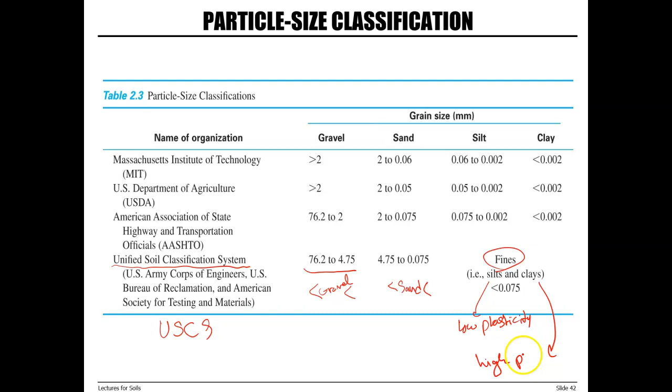Then we look at plasticity. Silt has low plasticity and clay has high plasticity, but based on size, their particles are smaller than 0.075 millimeters. This is the classification provided by the Unified Soil Classification System, from the U.S. Army Corps of Engineers. But other organizations provide different numbers.

For example, we have MIT, Massachusetts Institute of Technology, which has a different definition. Based on MIT, gravel is whatever is larger than 2 millimeters. Sand is between 2 to 0.06 millimeters. Silt is between 0.06 to 0.002 millimeters. So actually we have a size separation between silt and clay for MIT. Clay is whatever is smaller than 0.002 millimeters.

USDA, the US Department of Agriculture, also has grain size definitions. Gravel is the same as MIT, but the limit for sand is different, and also silt. Sand is between 2 millimeters to 0.05 millimeters, and silt is between 0.05 millimeters to 0.002 millimeters.

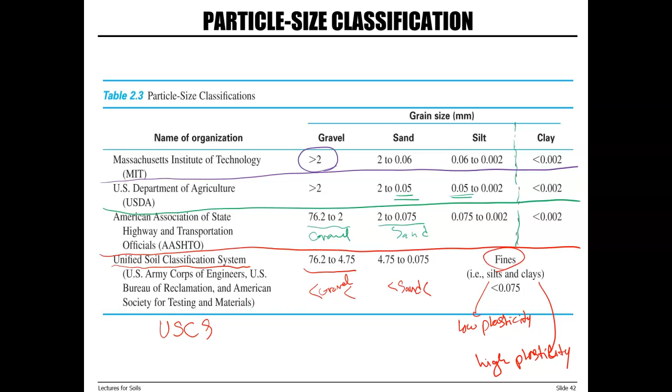For these three systems, there is a size separation between silt and clay. For USCS, we call silt and clay 'fines,' and the separation is based on low or high plasticity. This slide shows the same thing: the size definitions based on MIT, USDA, AASHTO, and USCS. USCS is the only one with no size separation between silt and clay, but the other three have clay, silt, sand, and gravel.

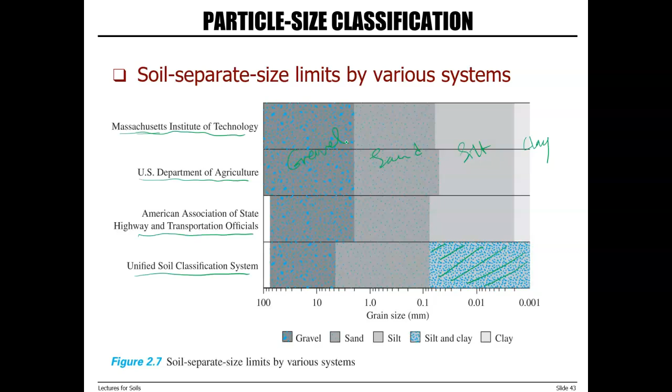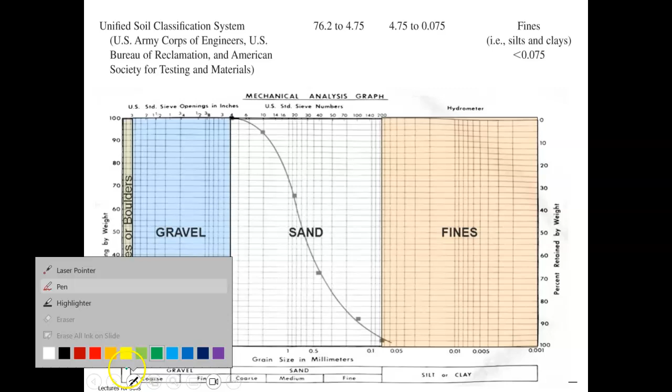Again, when we have a gradation curve, we see these sections. If we follow USCS, Unified Soil Classification System, these are the limits provided. Fines are particles smaller than 0.075 millimeters. So 0.075 here corresponds to sieve number 200.

Sand is particles between 4.75 to 0.075 millimeters. Here is 4.75 millimeters, which is sieve number 4. So this is sieve number 200, and this is sieve number 4.

Gravel is defined as particles smaller than 76.2 and larger than 4.75 millimeters, so between 4.75 to 76.2 millimeters. Anything larger than 76.2 millimeters is referred to as cobbles or boulders.

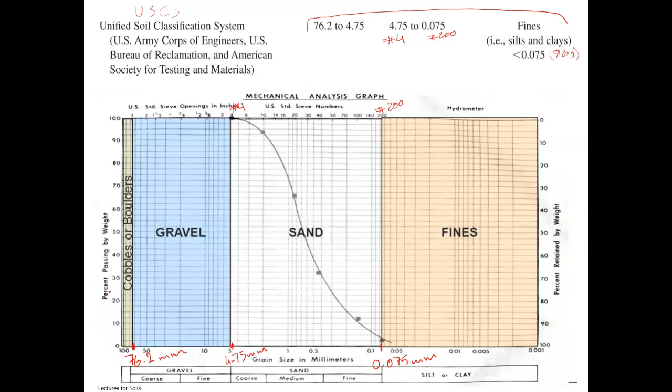So now we want to calculate. What we are trying to calculate in this lecture is, given a soil sample, what is the percentage of gravel, sand, and fines?

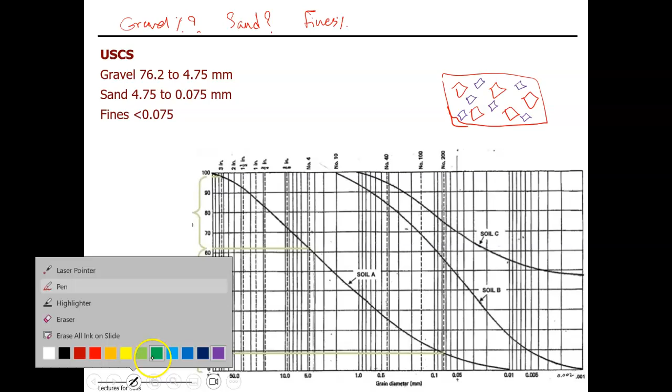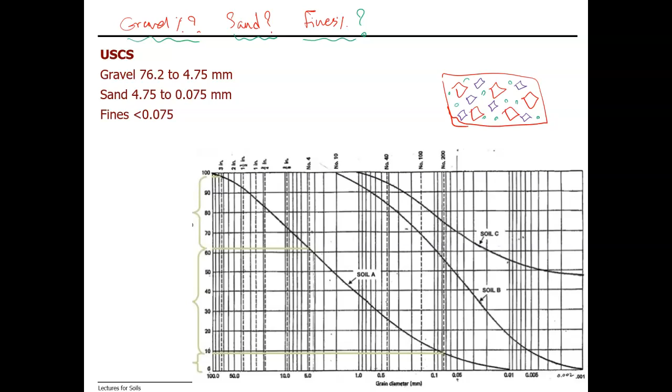So we have a soil sample containing gravel, sand, and silt and clay. We want to see what is the percentage of silt and clay, what is the percentage of sand, and what is the percentage of gravel. Our soil sample is made from particles of different sizes, and it's important to know how much of each size we have. So that's what we want to do: calculate the percentage of gravel, sand, and silt in our soil sample.

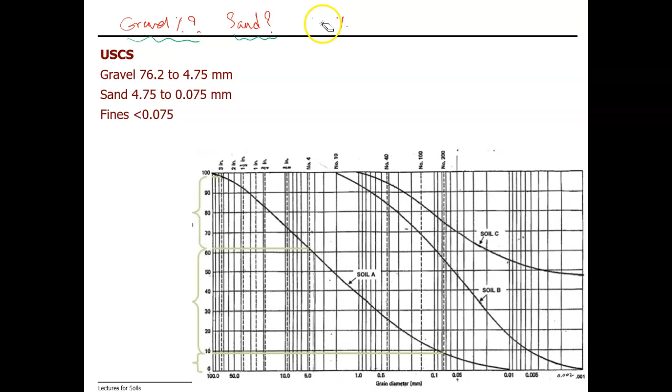Gravel, sand, and fines—for USCS, we refer to it as fines. Gravel is particles smaller than 76.2, larger than 4.75 millimeters. To calculate the percentage of gravel, we need to look at percent passing from these two sieves: 76.2 millimeters and 4.75 millimeters.

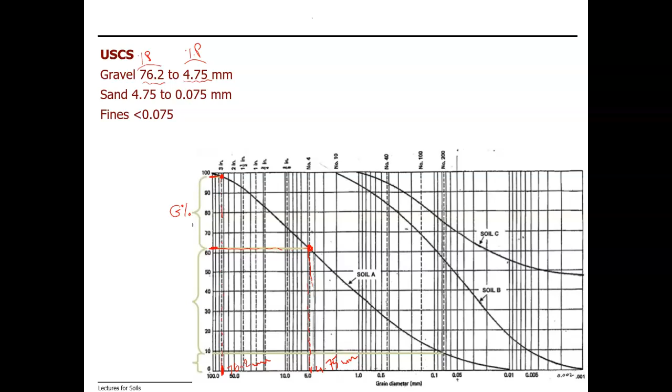You start from here, draw the line until you get to your gradation curve, then draw the line to percent passing. We need percent passing from 76.2, and same thing for 4.75 millimeters. The percentage of gravel equals percent passing from the sieve with an opening of 76.2 millimeters, minus percent passing from the sieve with an opening of 4.75 millimeters. That's how we calculate gravel percentage.

So 76.2 is 3 inches. Now we need to do the same thing for sand.

Sand is particles between 4.75 to 0.075 millimeters. So we need to look at percent passing from these two sizes: 4.75 millimeters and 0.075 millimeters.

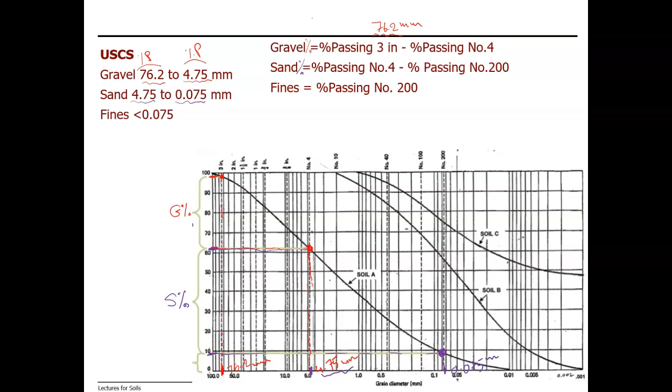Percent of sand in our soil sample equals percent of material passing through sieve number 4, which has an opening of 4.75 millimeters, minus percent passing from sieve number 200, which has an opening of 0.075 millimeters. And this is 3 inch, which has an opening of 76.2 millimeters.

And then finally, the percentage of fines. Fines are particles passing through or smaller than 0.075, meaning materials passing through sieve number 200. So fines percentage equals percent passing from number 200.

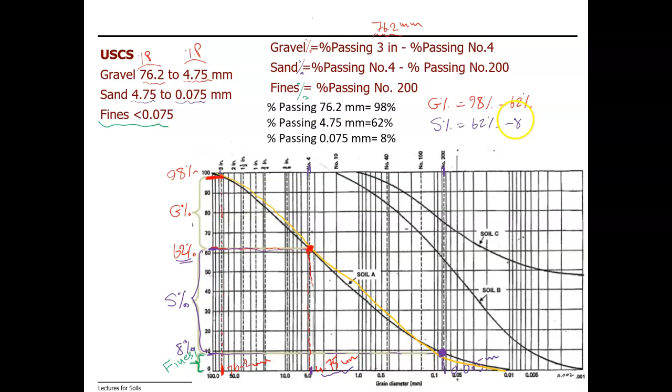Fines is percent passing from sieve number 200, so it's just 8%.

And if you add all of these together, you get 100%. So the soil that we have is 36% gravel, 54% sand, and 8% fines. Or we can say that 92% is coarse material and 8% is fines. So we can say that this is a coarse grained soil with 8% fines.

You can try to do the calculation for soil B and soil C to practice.

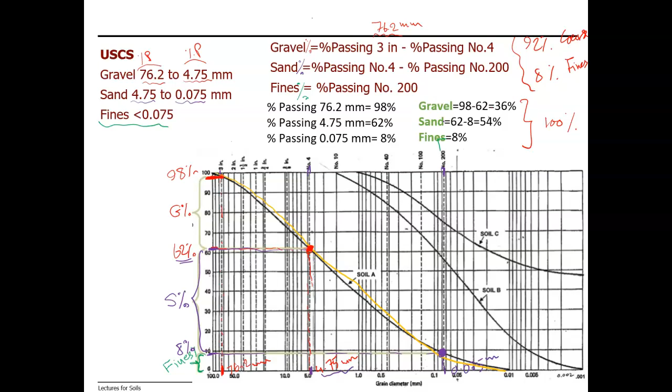Now let's go over a couple of examples. Example number 1, this is very similar to question number 1 in soil homework. For a soil, suppose that D10 is 0.05 millimeters, D30 is 0.25 millimeters, and D60 is 0.5 millimeters. Calculate the uniformity coefficient and coefficient of curvature.

Coefficient of curvature is D30 to the power of 2 divided by D10 times D60, and coefficient of uniformity is D60 divided by D10. So you just need to plug in the numbers and calculate coefficient of uniformity and coefficient of curvature.

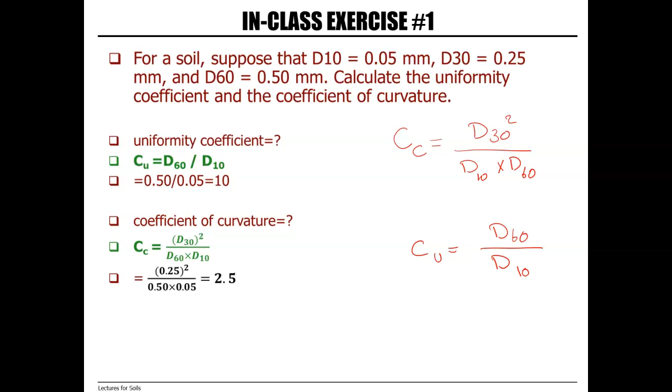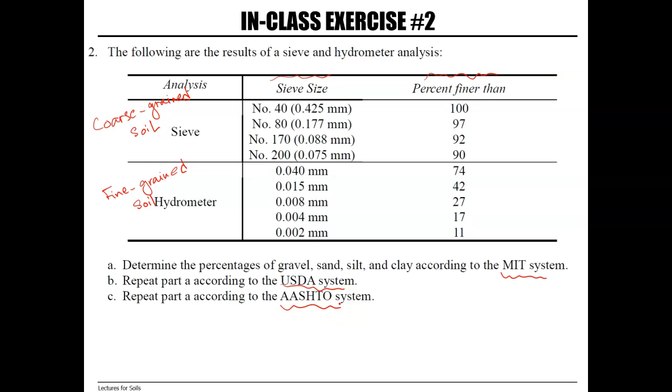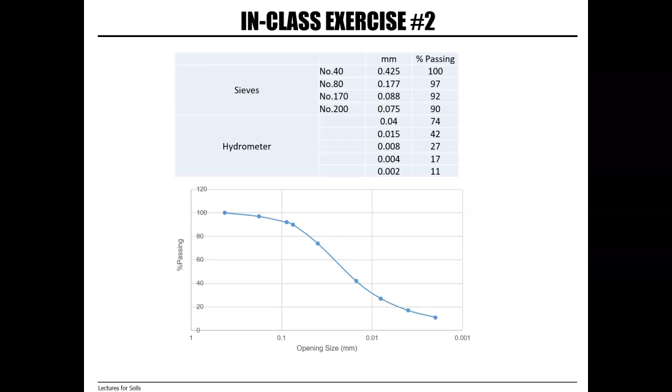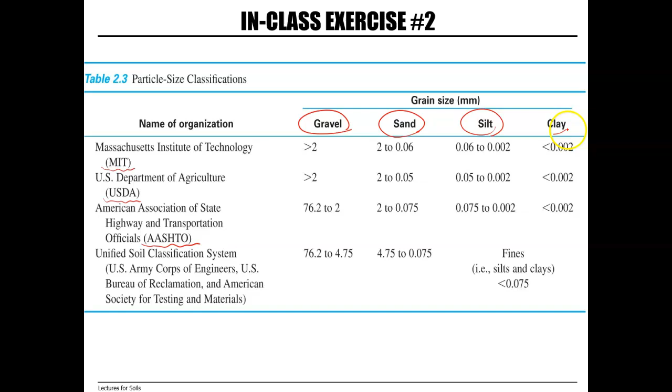So the first thing that we need to do is to make our gradation curve in Excel. Here is the gradation curve. Now we're going to use the gradation curve and use this table to find numbers based on AASHTO, USDA, and MIT requirements, and then calculate percent of gravel, sand, silt, and clay in this soil sample.

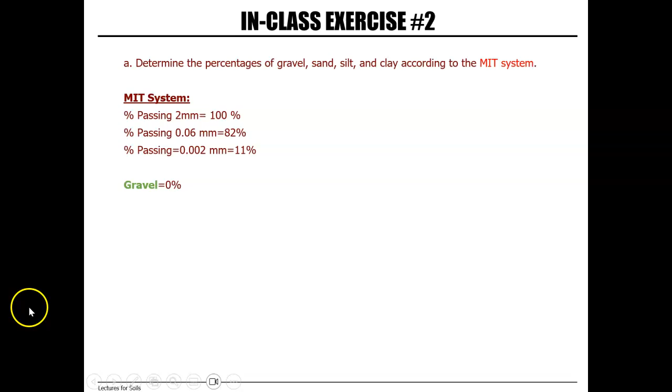So based on MIT, we say that gravel is larger than 2 millimeters. We don't see 2 millimeters on the opening size curve, so we can say that everything passes through or is finer than 2 millimeters. So that's why we say that percent passing or percent finer than 2 millimeters is 100%. All the particles are smaller than 2 millimeters, which means that percent passing from 2 millimeters is 100%.

So we had percent passing from 2 millimeters is 100%. We need to find percent passing from 0.06. This is 0.1 and this is 0.01. And we have percent passing from 0.06 millimeters as 82%.

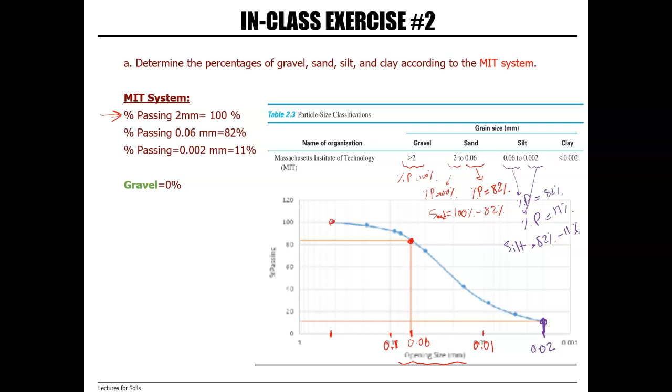Then we need to calculate silt. So we need to look at percent passing from 0.06, which was 82%, and also percent passing from 0.002, which is 11%. So silt is 82% minus 11%. And clay is particles smaller than 0.002, so it's equal to percent passing from 0.002, which is 11%.

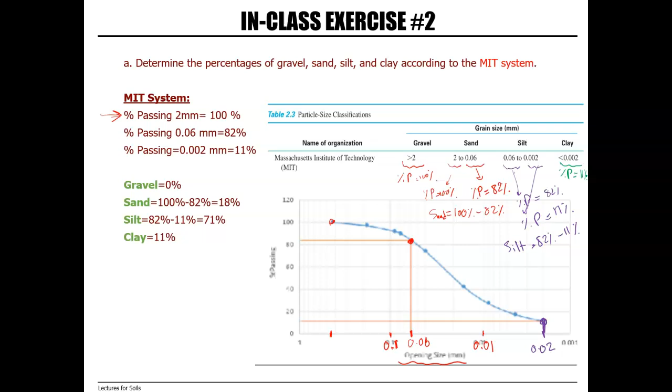Now we want to do the same thing, but this time we want to look at the USDA system. In the USDA system, we have gravel defined as particles larger than 2 millimeters. Again, we don't have anything larger than 2 millimeters, so our gravel is 0%, 100 minus 100. Everything passed through the sieve that has an opening of 2 millimeters.

Sand is defined as particles between 2 and 0.05 millimeters. So here we have 100% pass through the sieve with an opening of 2 millimeters, and then we need to look at percentage passing from 0.05, which is 80%. So sand is 100 minus 80%.

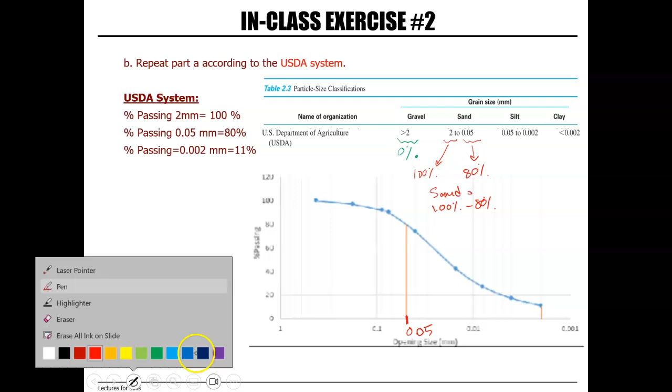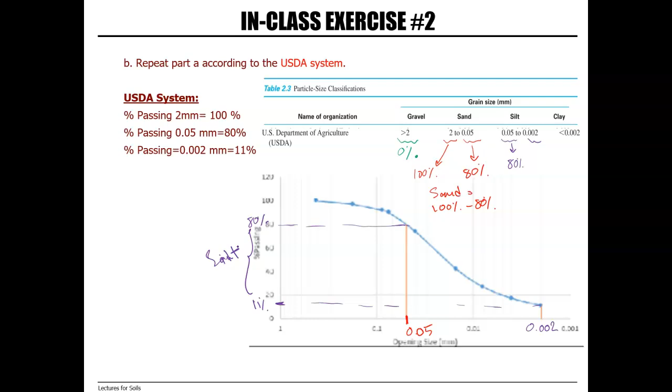Silt, we need to look at percentage passing from the sieve with an opening of 0.05 millimeters, which is 80%, and then 0.002, which is 11%. So silt is 80% minus 11%. And this is how much clay we have, which is equal to percent passing from 0.002, so it's just 11%.

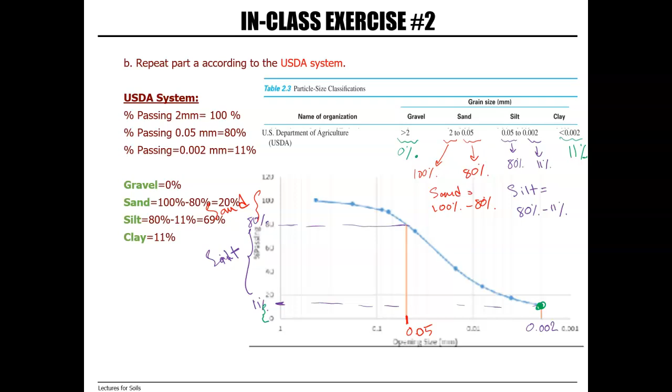Now we're going to do the same thing, but this time using AASHTO's numbers. Percent passing from 76.2 is 100%, everything is smaller than 76.2, and here is also 100%. So gravel is 100 minus 100, which gives us 0%.

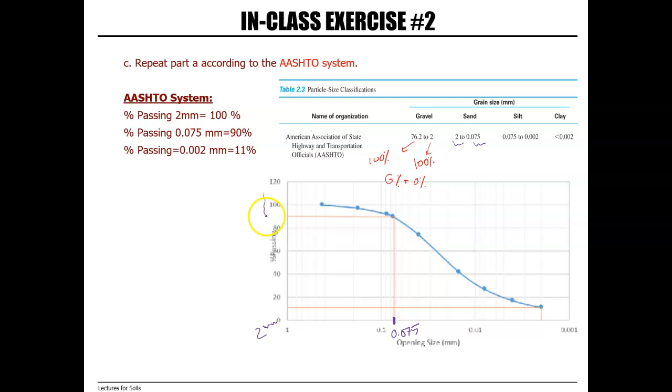We need to look at percentage passing from the sieve with an opening of 2 millimeters and percentage passing from the sieve with an opening of 0.075. So this is sand, and this is what's important for us here. From 2 millimeters, everything passed through; at 0.075 millimeters, we have 90% of materials passing through. So sand is 100% minus 90%, which gives us 10%.

For silt, we need to look at percentage passing from 0.075, which is 90% of particles smaller than 0.075. But then we also need to look at 0.002, which is 11%. Out of that 90%, 11% is smaller than 0.002. So silt is 90% minus 11%.

And lastly, clay. So this is silt, and then clay is this area, which is equal to materials passing from the sieve with an opening of 0.002.